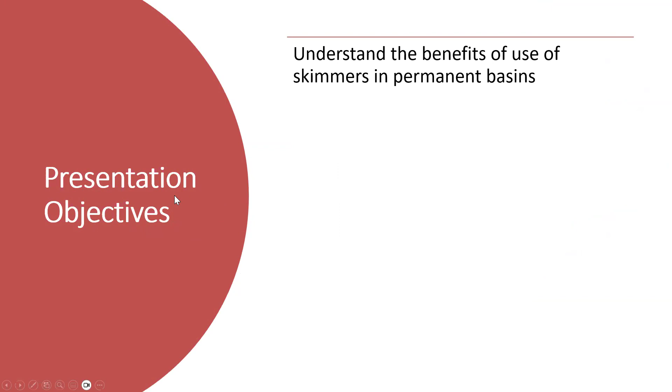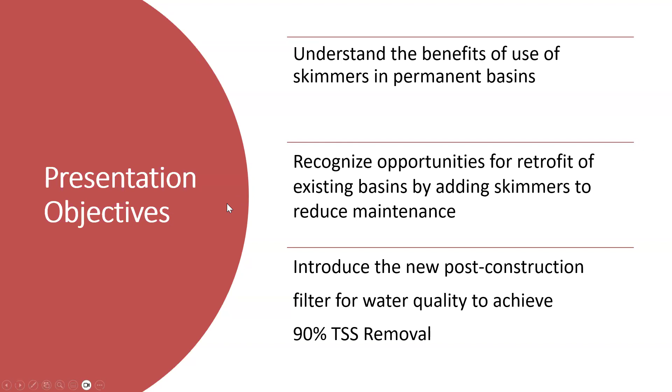So what we're going to talk about: we're going to understand the benefits of use of skimmers in permanent basins. Hopefully many of you are used to using these in construction settings and sediment basins. They've become quite popular and kind of the norm. We're going to talk about use in permanent basins. We're going to try to recognize some opportunities for retrofit of existing basins by adding skimmers to reduce maintenance and enhance water quality. And then we're going to introduce the new post-construction filter for water quality to achieve 90% TSS removal. I know that's all the goal we have is getting at least 80 to 85% TSS for most of our projects, and we'll show you how to do that with this new filter.

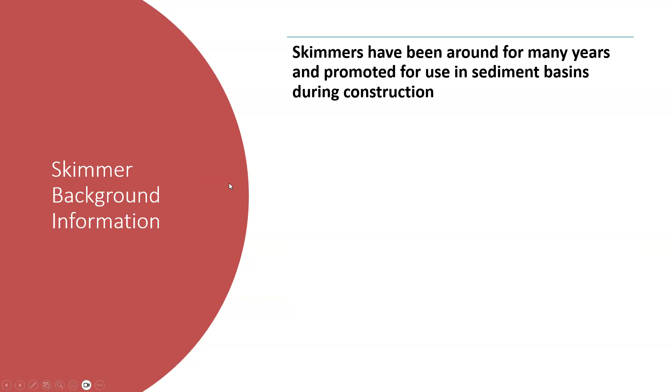So a little background information. Skimmers have been around for many years. They've been promoted for use in sediment basins during construction. That's probably been 20 to 25 years, depending on where you are in the country. I know some states are just now coming on with those, but like North Carolina, South Carolina have been around for quite a while. They meet the requirement for surface withdrawal from sediment basins. So most construction general permits have in there a provision to do dewatering from the surface of sediment basins, which drains the basin from the top down and it releases the cleaner water from near the surface. Skimmers have been shown to greatly increase trapping efficiency of sediment basins. So it's typical to get over 90% trapping during construction with those very heavy sediment loads, which is better than what we used to do with perforated risers.

Since we're doing that in construction, it makes sense to consider those for post-construction as well. So there are a variety of skimmers out there. The Faircloth skimmer kind of started things, at least on the commercial side of it. The Roshan Supply ESC skimmer, Marlee Float, IAS. There's one called the Delaware skimmer that is designed for contractors to be able to make themselves as well. And there's probably a few others, but these are the ones that I'm familiar with.

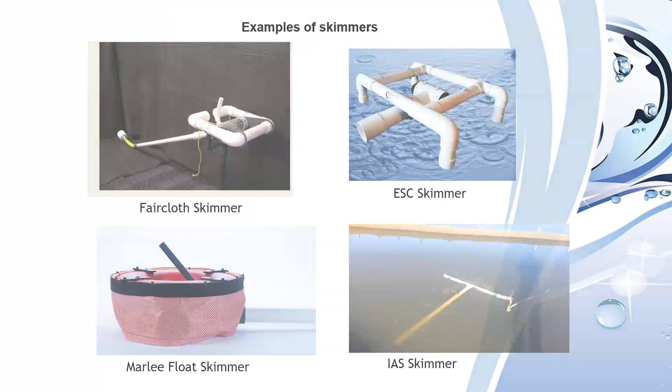Skimmers float at the surface of the water and withdraw from the surface or near the surface to release the cleaner water at the top of the water column. As water comes into your sediment basin, we want the sediment to settle as best we can, so the cleaner water is near the surface. The idea is you take that off first, giving more time for mud to settle and to trap as much sediment as you can.

I already got one question in chat, and I'll try to answer these as we go along, but may save some for the end. Can these work for cold weather climates during winter and freezing conditions? The answer is it depends. If I'm in South Carolina, yes, year round, because we don't get that. If you're in a very northern area with maybe six inches to a foot of ice, they're probably going to stop working once it gets really thick. So you do have to be aware of that if you're in a climate that gets more than say six inches or a foot of ice during the winter.

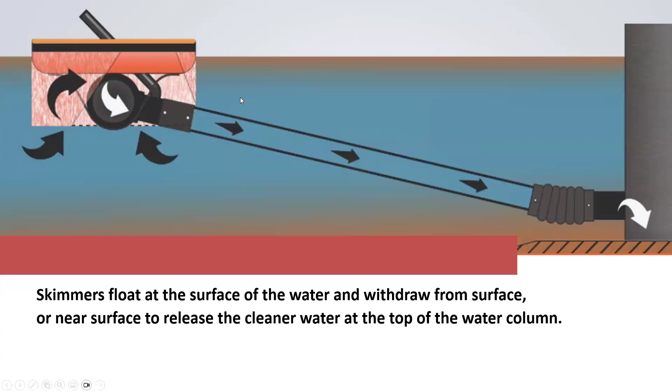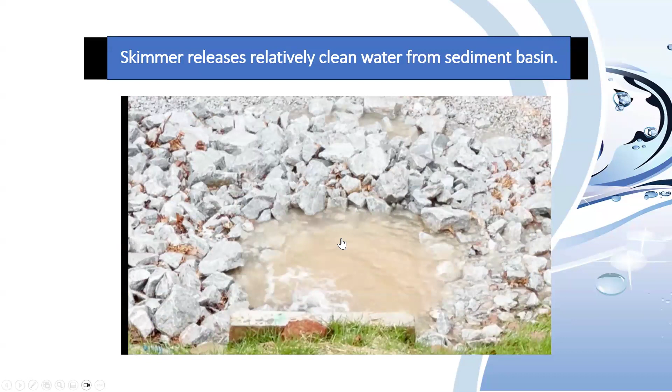Here's a quick video of a site not too far from us, right against Lake Hartwell, South Carolina. This is a sediment basin. You can see that basin was pretty muddy, but the discharge going out is actually relatively clean water. So from the really muddy sediment basin you saw there to that clean water being released, it's a good example of how effective skimmers can be during the construction phase in releasing cleaner water from the surface.

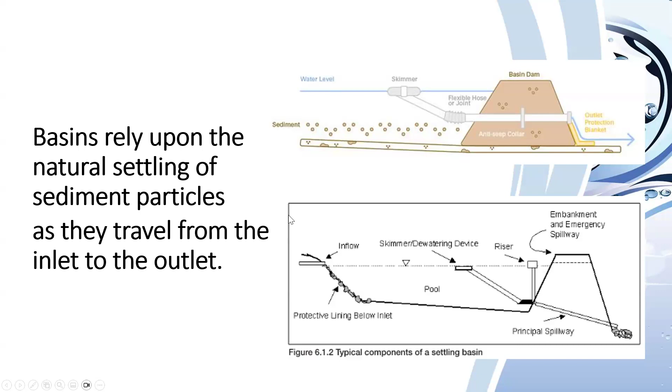Basins rely upon the natural settling of sediment particles as they travel from the inlet to the outlet. You've got water coming in, you've got sediment coming into the basin, so the idea is you want to get as much to settle as you can.

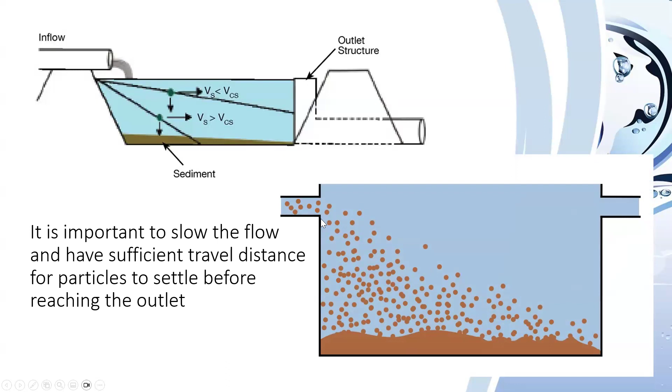Particle settling is dependent upon the particle size and the velocity of flow. So what we try to do is slow things down to give it time to settle. The heavy stuff's obviously going to settle out quicker, but the smaller particles tend to make it all the way to the outlet structure. So it's important to slow the flow down and have sufficient travel distance for the particles to settle before reaching the outlet. Here are a couple of graphic examples of what we're trying to accomplish: get the mud and sediment particles down to the bottom, and then release cleaner water from the pond.

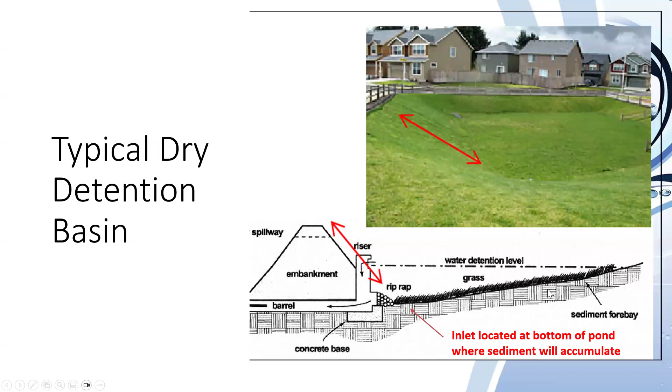So again, this is our typical dry basin. When construction's complete, you remove the skimmer. You can install some sort of low flow orifice at the bottom of the riser to release that first flush. This assumes you're in an area that has water quality requirements, and that first flush is the traditional method to achieve water quality. This often includes some sort of guard or filter to reduce clogging, to protect that as best you can. But with this traditional design, we're relying on ponding and settlement to settle all the sediment particles to the bottom of the pond, yet we're discharging from the bottom of the pond where the sediment concentration is highest.

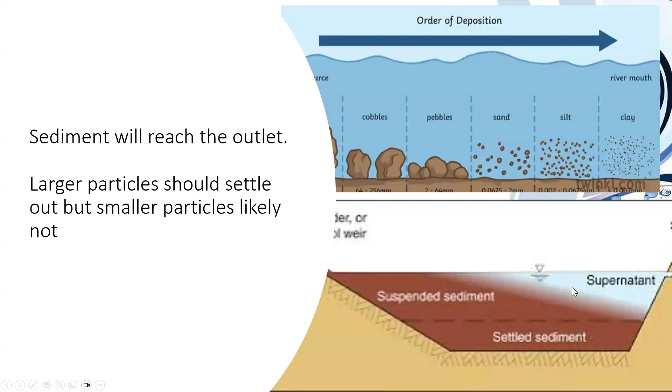So the sediment's going to reach the outlet. The larger particles are going to settle, but smaller particles likely will not. So what we want to do with the skimmer is use this natural settling and release the water off the surface sooner, or first, and then retain as much of this sediment in the pond as possible, which is what the pond is there for.

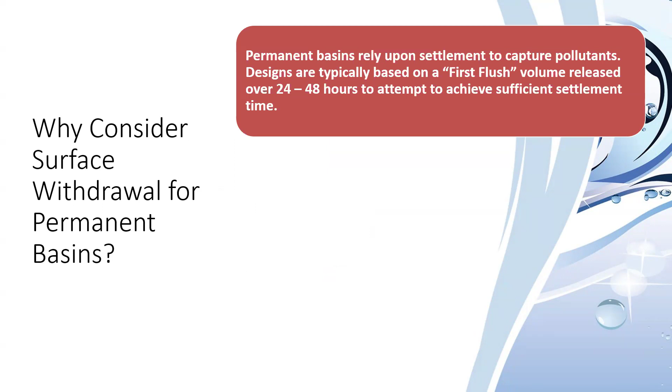So why would you consider withdrawal for permanent basins? First, permanent basins rely upon settlement to capture pollutants. Our designs are typically based on a first flush volume that's released over 24 to 48 hours to attempt to achieve sufficient settlement time.

The low flow water quality orifices often need to be 3 inches or less, depending on the size of your site, and they're prone to clogging. So they need some sort of anti-clog feature, whether it's a stone filter, perforated French drain type thing, or a variety of methods we try to use to prevent clogging there.

But the basins are meant to collect sediment, and over time they're going to have significant sediment buildup. So surface withdrawal from permanent detention or retention basins releases cleaner water from near the surface and allows more time for pollutants to settle.

Does it make sense to do this during construction, but then use an orifice at the bottom of the pond for post-construction? They've been very effective for construction basins, so it just makes common sense to consider that for permanent use as well.

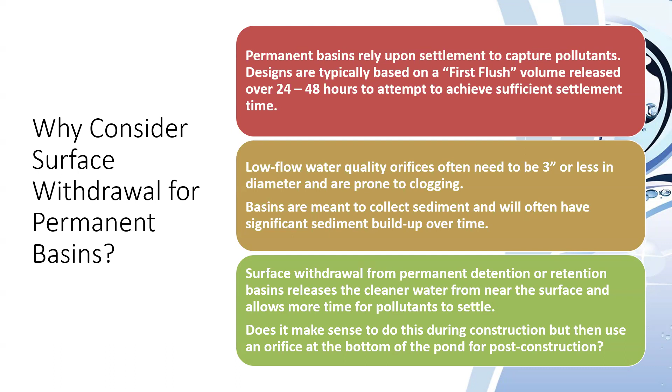To give an example, we're going to show two case studies. Both of these are projects I've been involved with over the past 10 years, two areas where we retrofitted ponds to help with maintenance issues. One is a former car dealership, Simpsonville Chevrolet in Simpsonville, South Carolina, and one is an apartment complex in Charlotte, North Carolina.

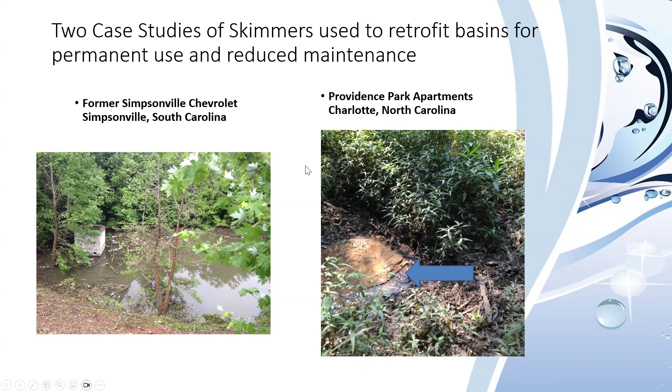So first we're going to look at this former car dealership. This whole wooded area, that's the pond. No surprise, they received a notice of violation for failure to maintain the pond, as it was severely overgrown and the outlet structure was not functioning properly.

After the timber was removed, and I do mean timber, it was 6 to 8 inch trees in there, we had a pond that was holding water, and it's typical in this area to have dry ponds.

We couldn't figure out why it was holding water because you didn't see any kind of low flow outlet in there. It was determined there was about 6 feet of mud and debris, and there was a 2 inch outlet at the bottom of this basin that evidently had clogged many years ago, and debris just kept building up over time.

Due to the size of the pond and the steep banks, it's about 3/4 of an acre pond. Side slopes are about 1.5 to 1, so getting equipment in and out is very challenging. We had initial estimates to clean the pond out that were $60,000 to $75,000, and this was back in 2013.

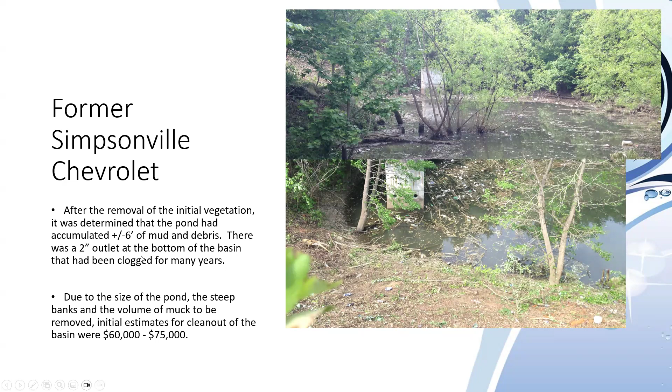We worked with the owner. We redesigned the basin, designed it to allow all that muck and debris to remain in, and modified the outlet structure to still meet regulatory requirements. This pond is located in Greenville County as the MS4, and they required that we maintain that 2 inch low flow discharge rate as part of the original design.

But we wanted to do that in a way that would not clog as easily as it did the first time. So, not having to remove the sediment buildup, we had a savings of over about $50,000 in the cleanup of this pond.

So what we did is we installed a skimmer, with a 5 inch orifice. We had to get this approved as a pilot project because at that time, skimmers were not allowed to be part of the permanent outlet structure in the county.

But that 5 inch orifice with very little head on it gave a flow very close to the 2 inch low flow orifice before. So the other orifices in the outlet structure were modified. You can see here, we closed in these orifices, put in some new ones, and kept the top of the riser structure.

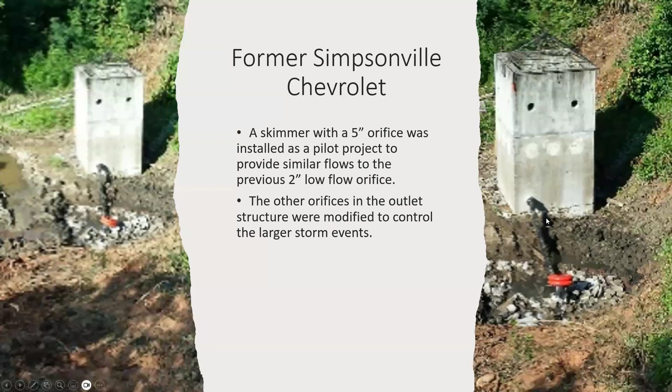It's hard to tell here, but that riser is about 12 feet tall. And there's another 6 feet of riser that's below what is now the bottom of the pond, from all the muck and debris that had built up over there.

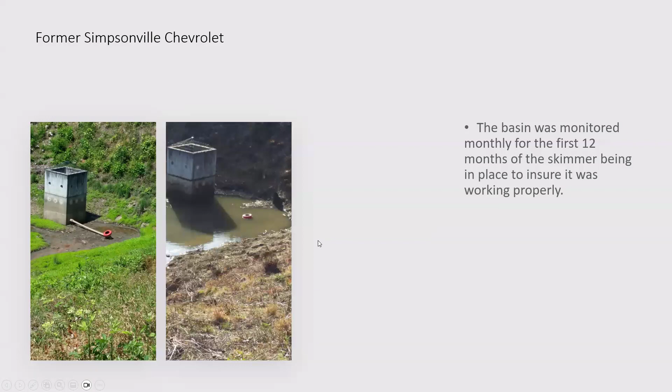Because it was a pilot project, we had to monitor it for the first 12 months of the skimmer being in place to ensure it was working properly. These are some different photos from different times during those first 12 months, just to make sure it was still functioning as designed, since this was the first time a skimmer had been allowed to go into a pond permanently in this area.

About a year later, in August of 2014, the owner was maintaining the pond. They had gone in and cut the sides and banks and not pulled out all the debris, basically letting it all fall to the bottom.

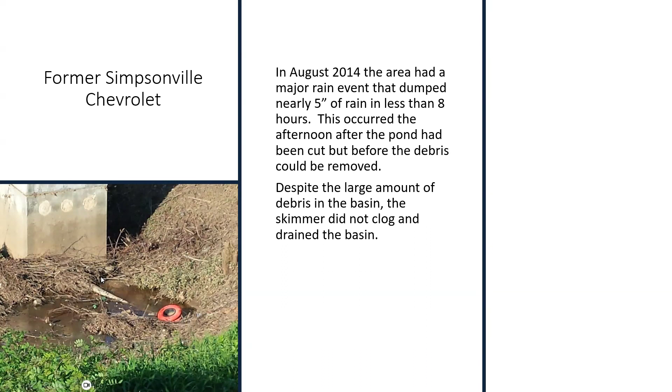We had a 5 inch rain in less than 8 hours, and it filled the pond up entirely and washed all that muck and debris down to the bottom of the pond. But as you can see, the skimmer sitting there, even with all that debris in the basin, still drained the pond down.

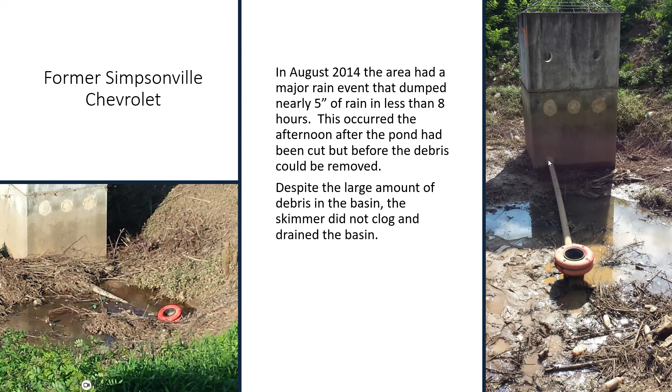And if it had become clogged, it's got a rope here—hard to see in the picture, but you could tug on the rope to get the skimmer to the side to unclog it. Much safer to do so than if you had a 2 inch orifice and 8 to 10 feet of water, trying to get to that orifice to unclog it. It would have been a very dangerous situation.

So we've now been using this pond as our area for research and development. We've done a lot of prototyping for ideas with improvements to the skimmer, and also adding filtration or filter fabric to the skimmer. This is one of the early prototypes we worked on. We put a filter around the skimmer to see if we could create something that would provide even higher water quality. The picture to the left is really typical.

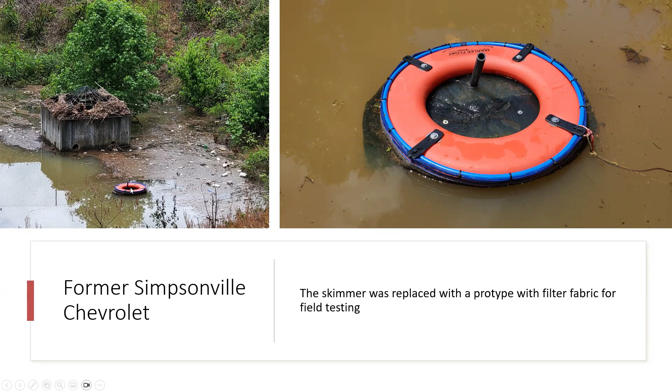This pond is in an area that's heavily commercially developed, but has very few other stormwater management facilities. So it receives about 30 to 40 acres of runoff, and it all comes to this basin. It has a lot of trash and debris in it, as you can see. So it requires some maintenance pretty routinely, but the skimmers definitely help keep it from clogging.

The modification of that pond resulted in a savings of about $50,000 in maintenance expense. Skimmers function very well as a low flow water quality outlet, and it's been much less prone to clog and easy to access for maintenance. As I said earlier, we continue to use this site as our research and development for the filter concept.

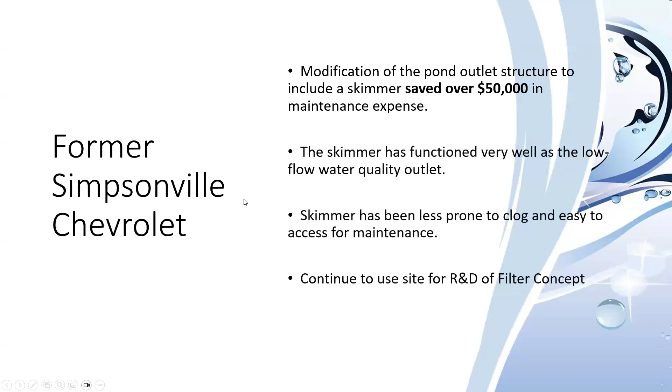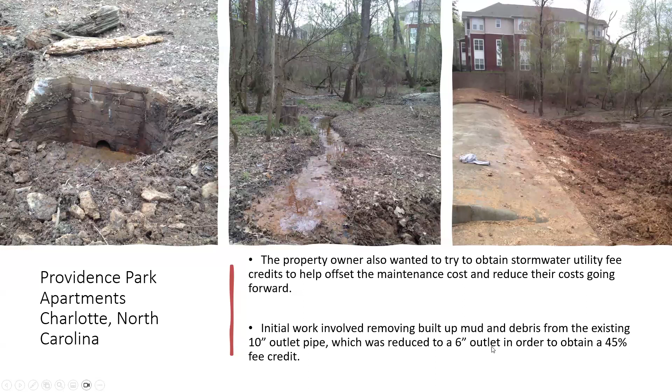The property owner also wanted to try to obtain a stormwater utility fee credit to help offset the maintenance work and reduce their costs going forward. So initial work involved removing all the built up mud and debris. From the existing outlet, we reduced that outlet to a 6-inch outlet, and we obtained a 45% fee credit for them at the time.

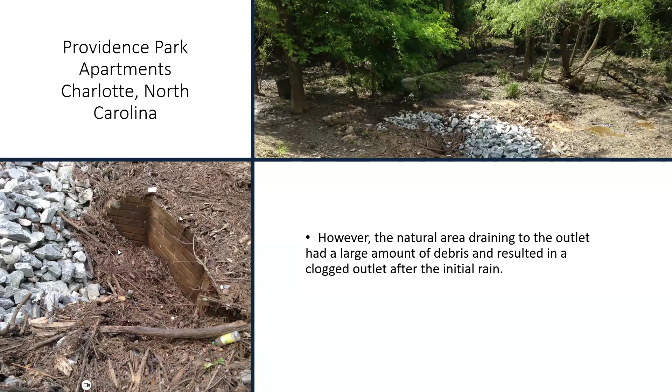However, with all the natural debris there, that didn't work very well. Every time it would rain, that outlet would get clogged up. Even though we had this nice riprap berm around it, water would come over that and put all the roots and limbs and rocks and leaves in there. Occasionally it would really clog up and hold water for days, if not weeks, and it was nearly impossible to keep the outlet flowing. The depth of the pond made it very difficult to clear the obstructions when clogged - this water is probably 6 feet deep or so, very difficult to get to the head wall and clear it out.

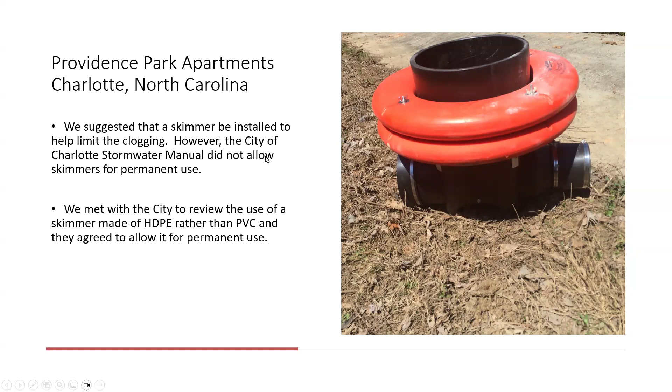So we suggested that a skimmer be installed to help limit the clogging. However, the City of Charlotte Stormwater Manual specifically did not allow the use of skimmers for permanent use. So we met with the city to review the use of a skimmer. This one in particular is made of HDPE rather than PVC, and they agreed to allow it for permanent use on the condition that we provide annual monitoring for them.

So we redesigned the pond to include a riser structure instead of just the pipe, and added the skimmer. In doing so, we also designed this on purpose to maximize their stormwater fee credit. The new design resulted in a 95% fee credit, which for this site was a savings in their stormwater fees of nearly $25,000 per year.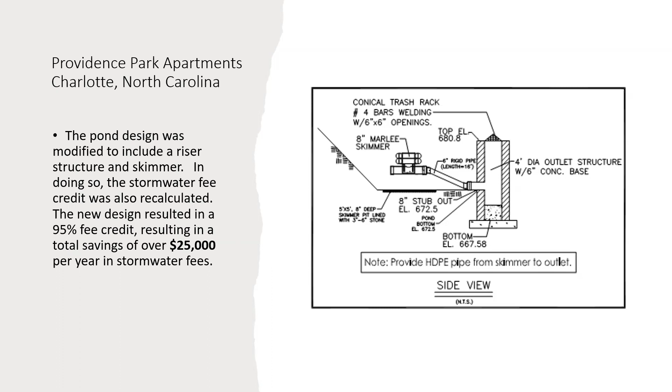So this is once the riser was put in and the skimmer put in place. You can see we dug out an area here for some sediment accumulation over time.

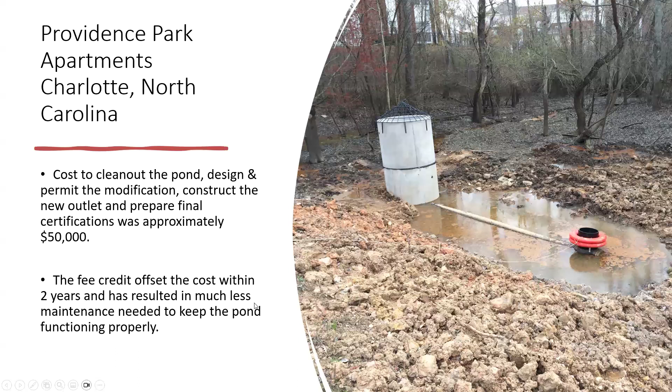But the cost to clean out the pond, design the permit modifications, construct the new outlet, and do all the final certifications was about $50,000 in total. And the fee credit savings of $25,000 offset that cost within 2 years.

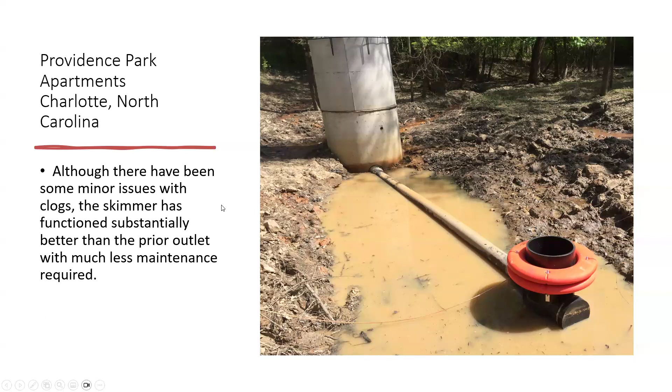There have been a few issues over time. We've had to tweak things here and there, but overall it's functioned extremely well with much less maintenance required. The pond continues to be monitored annually and functions with the skimmer in place. In August of 2021, we replaced the skimmer with a new design we developed in 2020, installing it as a prototype so we could keep an eye on it.

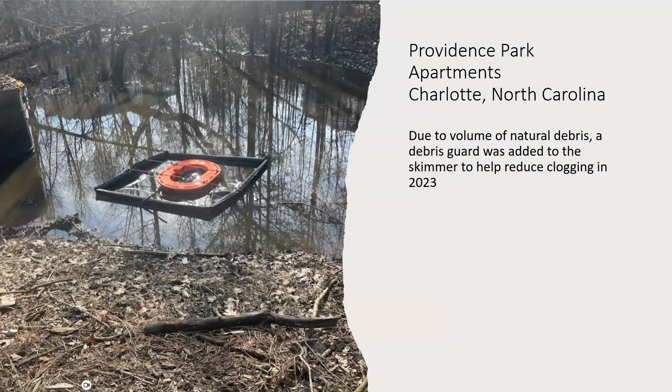Then in 2023, because there was so much natural debris in there, they were still having to go down after each rain to shake the skimmer and get it unclogged. So we installed a guard around it to help with the debris and keep the skimmer requiring less maintenance.

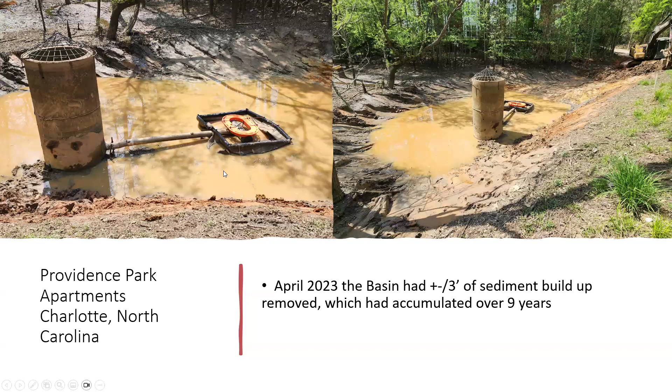Also in 2023, they had to do some maintenance. Remember, this riser structure was put in place in 2014. So between 2014 and April 2023, about 3 feet of sediment built up that had to be removed, accumulated over those 9 years. That's exactly what detention ponds are supposed to do, right? Capturing all that silt, debris, and sediment in the pond kept it from going downstream and impacting the waters downstream. So the riser structure and skimmer setup showed to be very effective in capturing the sediment coming to the pond.

So normally I do a little poll here, and since I set up the Zoom, I don't have poll ability, but I'll ask the audience: have you ever considered using a skimmer permanently? Through chat, or unmute and say yes or no, feel free to comment. The follow-up is, if not, now that you're aware of the benefits, would you consider it?

So we'll look at some flaws with the traditional method of doing water quality. Extended detention for water quality is what I see most often, either in dry ponds or wet ponds, using extended detention and a low flow orifice. The basin is designed to capture pollutants by holding runoff for an extended time, intended to allow for settlement—holding the water in the basin long enough for sediment particles to settle out.

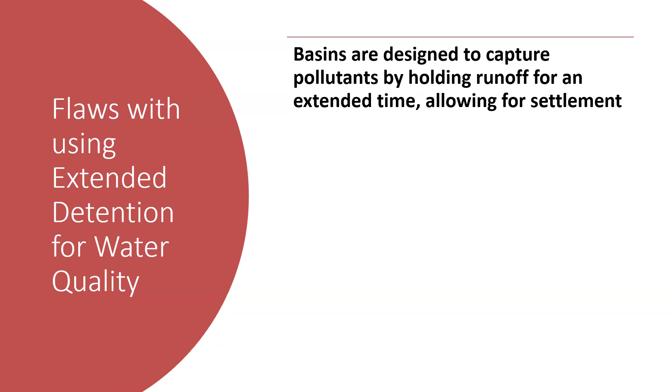So basins that rely on settling time provide very little treatment for smaller storm events. If you've got very little ponding or holding time and your whole method is based on settlement time, then with a small storm—say a quarter-inch or half-inch of rain over 8 or 10 hours—it's going to be really tough to get much settlement because you have so limited ponding time. Also, the volume-based design results in larger pond sizes, which we'll show in a bit, due to that first flush methodology.

Looks like you have some responses in the chat from the poll. I see we've got a lot of no's—people thought they were temporary. One yes, one about winter conditions. I agree with you on the winter conditions—you've got to either allow for intake or outtake, or what we often see is putting in a perforated riser with a valve on it. If you have frozen conditions, you can open that valve and allow the water to go through the riser for that limited time. But it's not a perfect solution everywhere, and certainly if you have a lot of ice, you have to consider it.

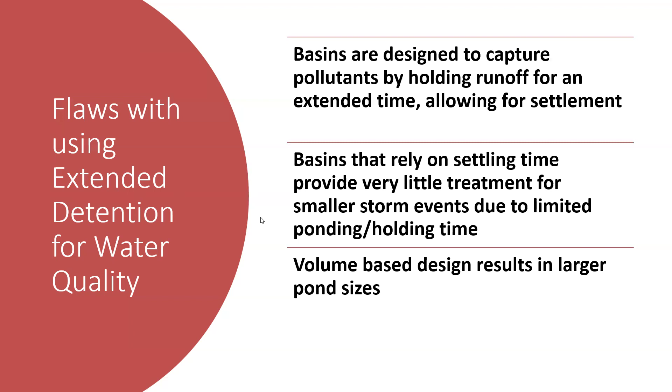All right, so what are some benefits to filtration instead of settling? Let's think about ways to provide water quality—you can either let the sediment settle, or use some sort of filter or other way to take the sediment out of the water before it gets discharged.

Number one, ponds provide a large containment volume to reduce maintenance frequency and treat larger drainage areas. If you're filtering but using that filter to keep the sediment in the pond, you've got a pretty big volume of sediment you can hold there, kind of like we just showed on that Providence Park pond.

Also, there's an excellent potential to retrofit older basins that did not include water quality benefits in the design, if your peak flow rate can be maintained. So I'm sure many of you are doing redevelopment. You go into the shopping center and it's 30 years old and it's time to redo something - tear down one building, put in something new, change a parking lot. And often we're required to provide water quality, and there may be a detention pond there that was just quantity based, but no quality.

If you try to use that traditional first flush method and hold that first flush volume over for an extended period of time, you don't have enough volume. However, if you can use a filter and maintain that flow rate, that's an excellent way to retrofit that pond, and really a very cost-effective way to provide water quality for the entire area draining to the pond.

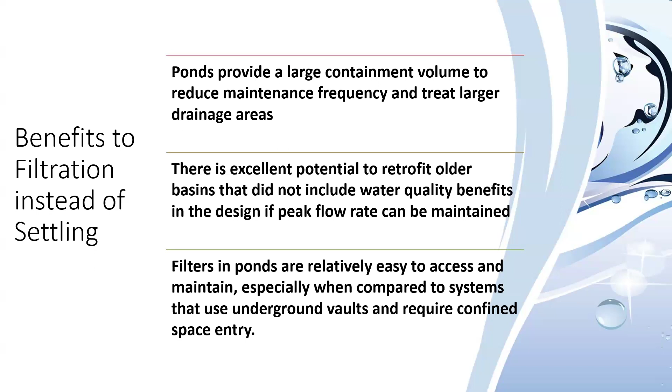So some of the other benefits to filtration versus settlement is the peak rate of discharge can be based on the filter treatment flow rate up to that first quantity storm event, which results in smaller pond volumes. Typically, when we're designing these ponds, a 2-year storm is probably the norm. Some places require a 1-year storm as the smallest you've got to look at for quantity controls.

If your filter can handle that rate, you can discharge at that rate up to that event. The other benefit is the filter treats 100% of runoff from the storms up to the peak rate of the filter, including the very small storms with minimal ponding. So if you're using filtration and you had that really small storm event, that small storm still has to go through the filter to be discharged. So it's now being treated, typically much more effectively than it would be if we were relying on settlement and ponding to do so.

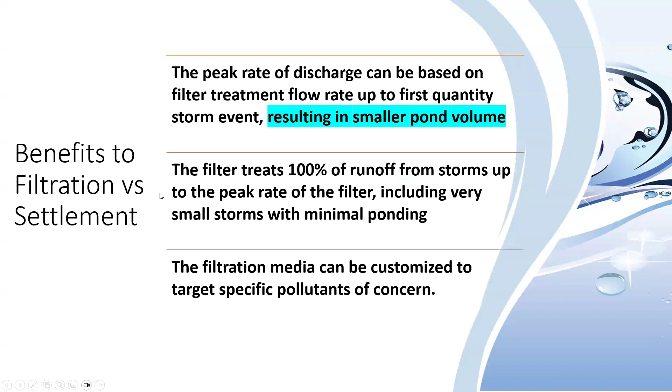The last item is the filtration media can be customized to target specific pollutants of concern. Hydrocarbons are a concern in many areas - it's pretty easy to add a media that can absorb hydrocarbons. Metals may be a concern, phosphorus, nitrogen. There are a variety of other materials out there that can be added to your filter, providing a real benefit in targeting some pollutants that settlement by itself may have a harder time removing.

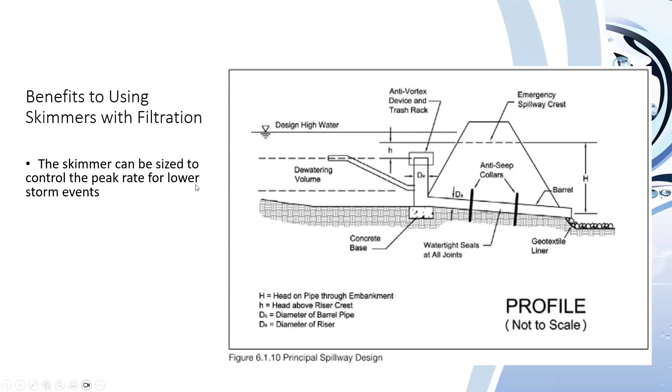So we've talked about filtration. Now let's add a skimmer to a filter. What would be the benefits to using skimmers with filtration? One, the skimmer can be sized to control that peak rate for the lower storm events. Depending on the size of your site, you may be able to size the skimmer to handle that 2-year flow. So now the skimmer is your low flow orifice, and also it's handling up to your 2-year storm event.

I apologize, I'm fighting a little bit of a cold today, so trying to minimize the coughing.

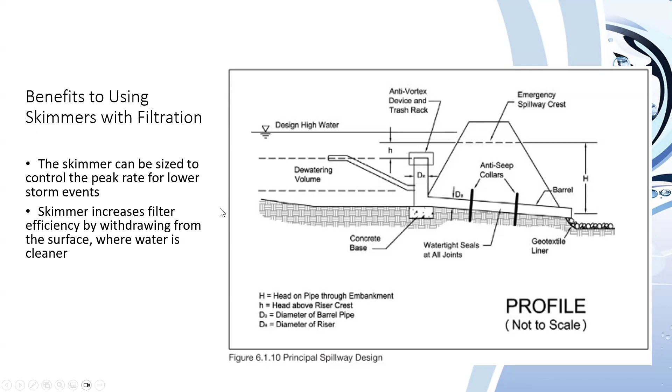The skimmer increases your filter efficiency by withdrawing water from the surface where the water is cleaner. If your filter were just stuck down at the bottom, it's going to get the highest concentration of sediment. But if your filter can float up and down with the water level and just treat the water closer to the surface, it's not having to work as hard. There's less concentration there, so your filter works better, lasts longer, and has a higher efficiency rate. Lastly, the skimmer is easy to access or pull to the side of the pond, so you can get to that filter and skimmer for maintenance and changing of the filters.

So there are some challenges to using skimmers with filtration. Number one, filters are prone to clog over time and will require maintenance and periodic cleaning or changing. We all recognize maintenance is a huge issue in stormwater management, whether it's a pond, a catch basin filter, or any other type of device, and even an LID - a sand filter, bio retention area - any of those things are going to require maintenance over time. Filters may require a little more maintenance than some of the other products, but they're maybe also less costly to do so and easier to get to.

A skimmer has to be durable and last more than a few years to be suitable for permanent use. We recommend HDPE versus PVC products for this. There may be other products that are more durable and designed for permanent use, but you have to make sure it's going to hold up for quite a while.

You need something that's not going to degrade in UV over 2 to 3 years. We've also had a couple of comments about frozen conditions. You're going to need an alternate drain during frozen conditions, or it just may not be suitable. If you're in an area that has several months out of the year with frozen conditions, this just may not be the right tool for that situation.

The biggest challenge we see right now is there are no established standards for basis of design and permitting based upon a combination of pond and filtration.

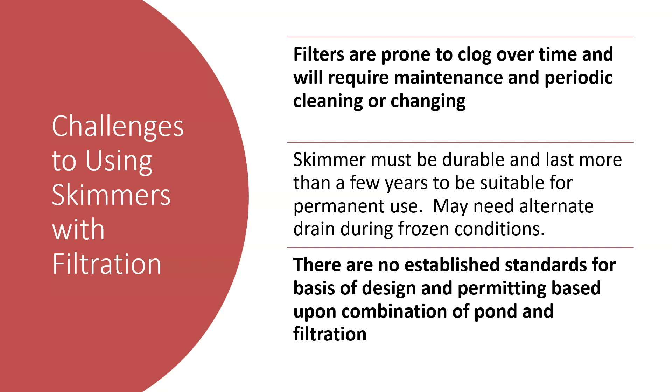Rebecca was kind enough to share our attendee list on Friday, and skimming through, it looked like we had a lot of city, county, regulatory folks who had signed up for this. So for those of you on here, I'd love to hear your thoughts on how we manage the permitting process and how you can incorporate ideas that are maybe a little outside of the mainstream, but also very effective, so that those tools can be allowed to be used in your area.

Currently there are 2 widely recognized testing protocols that I'm aware of: the Washington TAPE program and the NJCAT certification program. The Washington TAPE program is a field version, so you actually have to find sites, go through a year or two of storms, have those monitored and sampled and lab tested to show the results. Very effective, gives you real world test data, but also very expensive and time consuming.

You also have the NJCAT certification program. NJCAT has established protocols and standards for testing, and a lab has to be certified to meet their certification. That lab can then test your product, you send the results into NJCAT, and they'll verify your device and say you're now certified to meet a certain percentage TSS removal. TSS is the main one.

What you may not be aware of is that ASTM now has standards for sediment retention and sediment devices and stormwater products. ASTM is still in development of many of these; some have not been finalized yet, and others are coming.

Somebody asked if there's a speaker voice technical problem. I hope not, but if other people are having trouble hearing me, please let me know. So far, it sounds good.

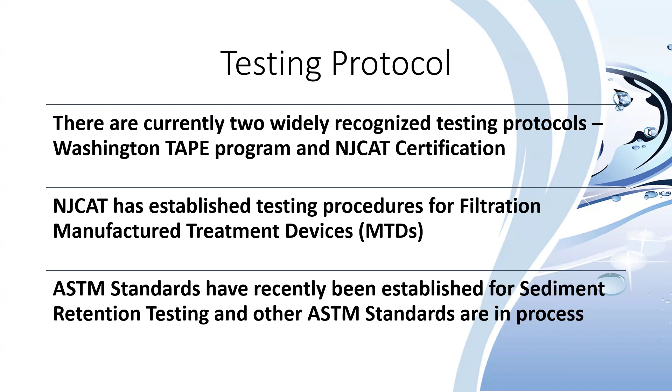So again, ASTM standards have come out, and some of you may also be familiar with STEPP, a national stormwater program—I can't even remember what STEPP stands for. But all the STEPP program protocols are going to be based on ASTM standards. ASTM has long been recognized as having a very rigorous process for establishing their standards, a very trustworthy program, and a good basis to base your designs on.

We've gone through prototyping, trying to come up with how to do a filter around a skimmer, for about 5 years now. I'll go through a couple of examples to show the process. We had one with strips of non-woven geotextile on the outside and coir fabric on the inside, plus another layer of fabric, trying to make sure we filtered water thoroughly. We had a flow rate of about 140 to 150 gallons per minute per square foot, trying to keep up with the skimmer.

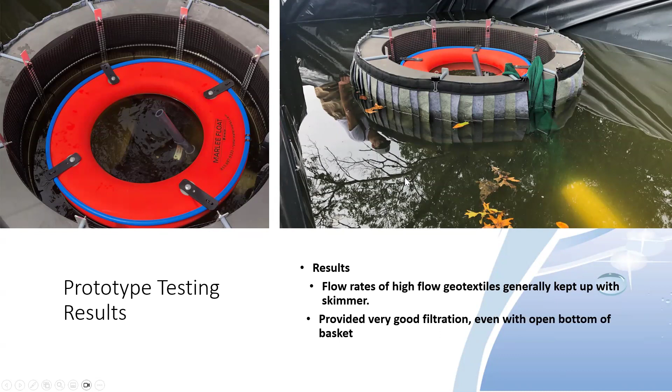What we found is the flow rates generally kept up with the skimmer and it provided good filtration. In this case we had an open bottom, so the thought was you'd filter what's near the surface, and if it was more than a couple feet below the surface, you'd just let gravity do its job. But over time we found this wasn't big enough to keep up with the flow rate of the skimmer, especially on some of the larger skimmers. We even put dye in the test tank to see if water was getting pulled in.

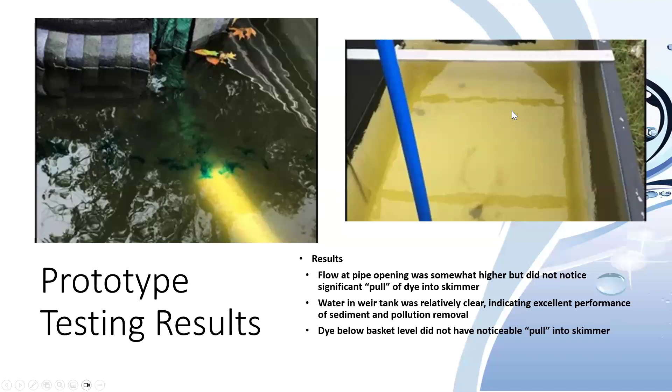Because you obviously got a pipe leaving, is water getting pulled in through that opening or pulled in through the bottom? Saw very little of that. This picture on the right is the outflow. We had a weir tank set up to test the flow rates, and really clear water was coming into this. We were pulling water from a farm pond, so it wasn't really dirty either, but I can say the water here was much cleaner than what we were pumping into it.

Again, kind of check the fabric. We had a lot of algae and general debris in the farm pond getting pumped in. What we found is the coir fabric did not seem to blind off or trap too much of that, so it showed pretty good filtration.

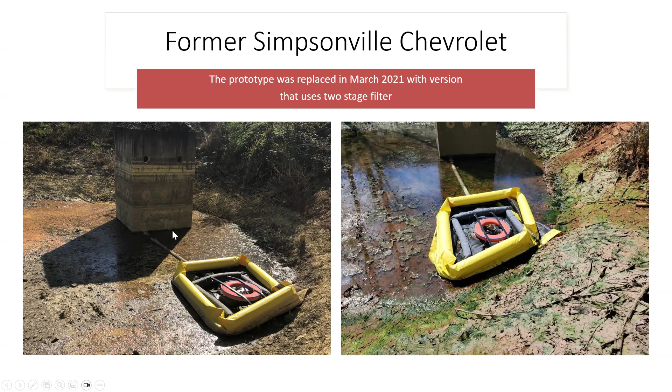But we decided in the end to go with a different product. So we did a two-stage filter back in March of '21. The outer stage is sort of a turbidity curtain, with just a polyethylene screen in it - it's a Mirafi fabric. The inner was a non-woven material called Adsorbate, which in addition to TSS would absorb hydrocarbons as well. This is in that same pond we showed earlier as one of our examples for research and development.

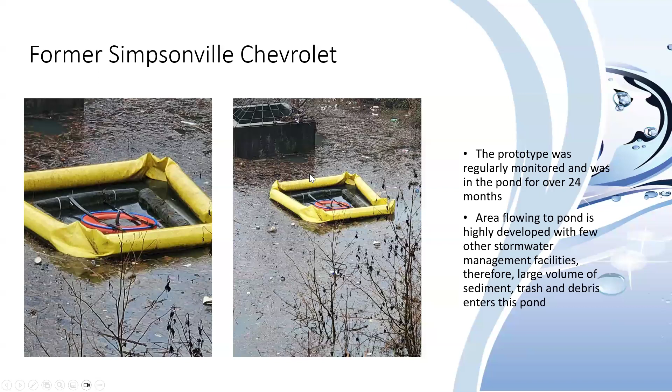We had the prototype in the pond for over 24 months. We wanted to make sure it would last long enough to be worthy of having on a site - if it's going to fall apart or clog up in 6 months, it's not going to work. The area flowing into this pond is highly developed with few other stormwater management controls. As you can see from these photos, a large volume of trash and debris enters this pond, making it a real challenge to keep the outflow clean.

We set up a time-lapse camera at the pond, and this was taken in July of '21. You can see here, on July 7th it just started to rain. By the morning of July 8th, about 12 hours later, the pond was full - you can see the skimmer here is all the way up to the top of the riser.

Later that morning, the pond's now starting to come down. That evening, it finally stopped raining, and it kind of rained on and off most of the day of the 8th. By the morning of the 9th, you can see we've made some progress draining it down, and by the 10th it's pretty much already drained.

If you recall, the design of this pond was based on the first flush method, so the intent was to hold a 1-inch runoff volume for at least 24 hours. This time lapse shows we're holding it for about 48 hours to drain that full volume down. The volume all the way up to these orifices is more than that 1 inch - that's probably more of a full 2-year storm, so probably 3 or 4 inches of runoff from the area coming down. It's a good example of skimmers working, draining the basin slowly, allowing the sediment and other pollutant particles to settle out.

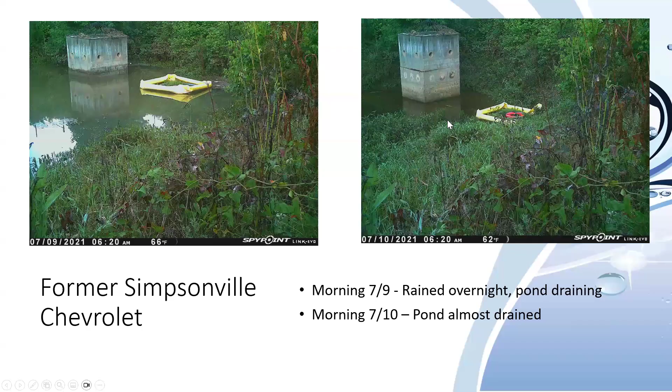One of the other things we noticed during this time was vegetation started to grow in the inner non-woven filter. At first we were like, that's not a good thing. But then we started thinking, hey, if we put the right seeds in this thing, and it's kind of in that non-woven filter fabric that just catches stuff, maybe there's some potential for nutrient removal. We also recognize nutrient removal sometimes takes a lot of vegetation for any kind of uptake of phosphorus or nitrogen, so maybe not - we'll kind of test that in the future. But it was just an interesting observation that happened.

Over the winter, the vegetation died, so we went in and trimmed it up, cleaned it up a little bit, but we didn't change out the filters - we wanted to keep those in place to see how long they would last, make sure they'd last at least 2 years. So again, we may look in the future at potential to target certain pollutants with certain vegetation, if we can get enough of that, especially on the larger filters.

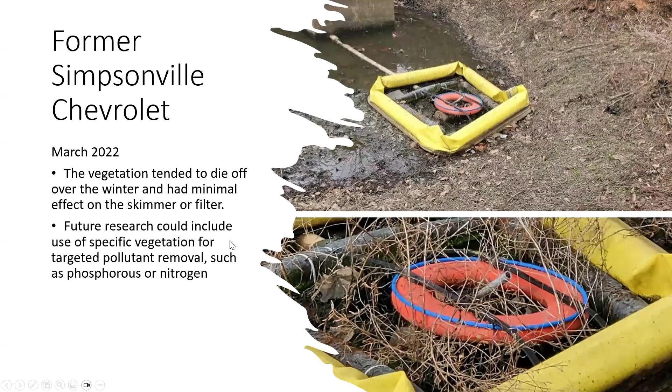We did notice in July of that year, the vegetation returned. It could be something worthwhile, although I'm not huge on the chemistry for the phosphorus and nitrogen - so if you only had the vegetation growing during the spring and summer months, would that still be a benefit or not if it died off during the winter?

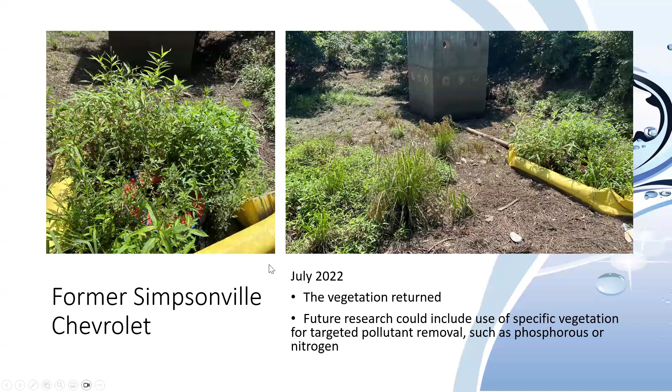So the field testing showed that it seemed to be working well. So we decided to take the next step and go to third-party testing to confirm TSS removal, and we had TRI Environmental do that testing for us.

When we had TRI do the testing, we wanted to do this in a way that would give us the worst case scenario. So the ASTM requirement, or standard, requires two versions of the skimmer with the filter to be tested, and there had to be double the flow rate between one and the next. One was tested at around 30 gallons per minute flow rate, and the other had like 140 gallons per minute flow rate. So pretty different flow rates there.

The other thing we did is we had the sediment-laden water enter right at the filter. With your typical detention basin, you're going to have a forebay, and you're going to try to maximize the length between your inlet and outlet to give as much distance and settling time as you can. Well, we said it's going to be really hard if we incorporate all that to see how much of a benefit the forebay was, how much was the travel distance, how much is the filter, how much is surface withdrawal.

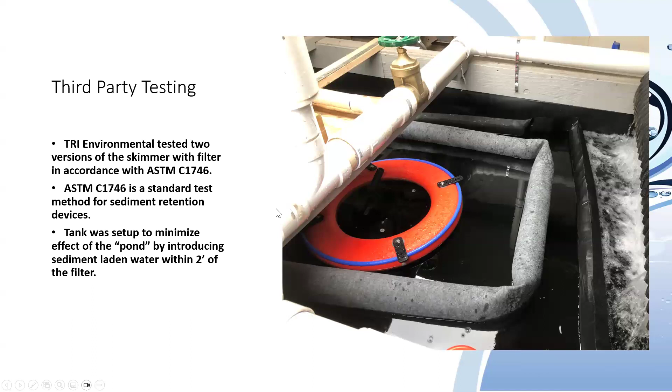Again, we did this to the ASTM standard C1746, which is the standard test method for sediment retention devices. We've had some questions in the past about soil gradation - all that's in the test. I can't include that in this presentation, but if anybody has any questions, we're happy to provide the test results and all that backup detail.

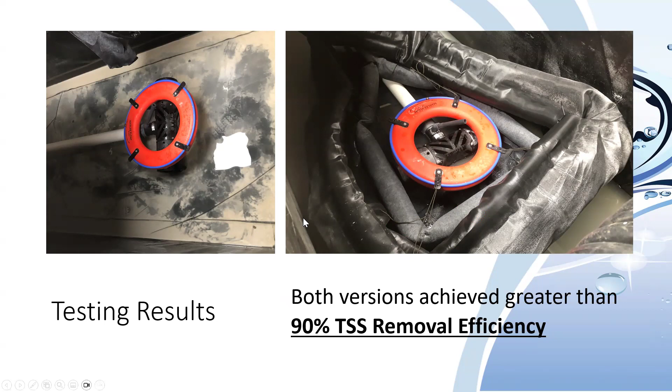So again, we had to do two versions of the skimmer. Both versions achieved greater than 90% TSS removal efficiency - one got 92%, one got 96%. TRI felt comfortable saying 90% was reasonable for the skimmers. Based on these test results, we can scale the size of the filters for other skimmer sizes as well that have higher flow rates than what the test tank could handle.

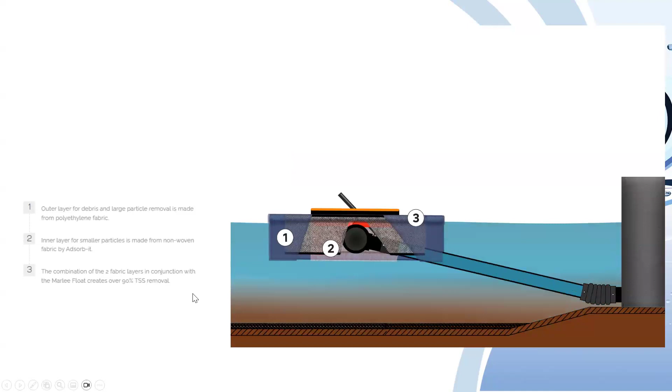So this is just a representation of how that works. You've got an outer layer for debris and large particle removal - it's a polyethylene fabric. You've got an inner layer for the smaller particles, again that's the non-woven fabric by Adsorb-it. The version we use actually has an antimicrobial treatment as well. And when you put those together with the skimmer, with the surface withdrawal, that system achieved the 90% TSS removal rate.

Now I want to talk about advanced skimmer modeling, so a filtration-based water quality approach, and how that would compare to your traditional first flush model. We're going to go through a sample site here. The first flush model, if you're not familiar with it, typically you take a certain volume - in our area it's 1 inch of runoff over your area, and you release that over 24 to 48 hours. Versus a filtration-based model, which is just based on the flow rate of the filter to be able to handle that flow and treatment up to whatever your first quantity storm is.

So our sample site, let's just assume we have 5 acres. We've got a pre-development condition, curve number 55 for wooded, and post-development is going to be commercial. So we're going to take a 5 acre natural wooded area and convert it to a shopping center.

Got a question about Georgia using turbidity as criteria rather than TSS. I am familiar with turbidity as a requirement during construction in Georgia. I'm not familiar if Georgia has that requirement post-construction. And what I would say is the skimmers do a little bit of help with turbidity during construction, not much - you're really going to need flocculants or some other way to take out turbidity.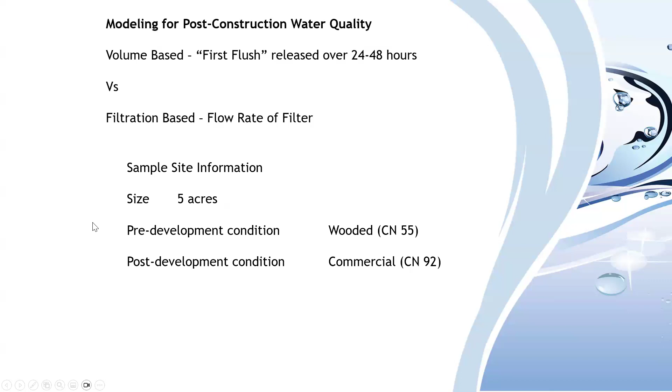So anyway, getting back to our sample here - post-development, again, we're going to a shopping center, curve number 92. The first thing we're going to do is come up with what our pre-development flow rates are. So based upon a 5 acre site, I just assumed a time of concentration of 48 minutes.

And we said our 2-year flow is going to be 0.72 CFS. Oops, back up—10-year, 325, so on. So we're really just going to focus on this 2-year and lower flow rate for this example.

So the next thing we're going to do is look at our water quality volume and our post-development flow rates. Based upon that 5 acre commercial site, I assumed a time of concentration of 10 minutes, and we want to calculate the water quality event.

In this area, we just assumed a 1 inch runoff was what's required. So I went through trial and error and came up with a 1.73 inch 24-hour storm that would generate that 18,150 cubic foot volume of runoff. So even though it's curve number 92, it takes more than 1 inch of rain to generate a 1 inch runoff volume—almost 2 inches of rain in this case.

It's important to note the water quality volume does vary from state to state. 1 inch to 1.5 inches is typical, is what I'm seeing in most states as far as requirements. But in this case, our water quality flow rate—this is just post-development before any pond—is 7.2 CFS. And the 2-year was jumped up from 0.72 to 19.72 CFS.

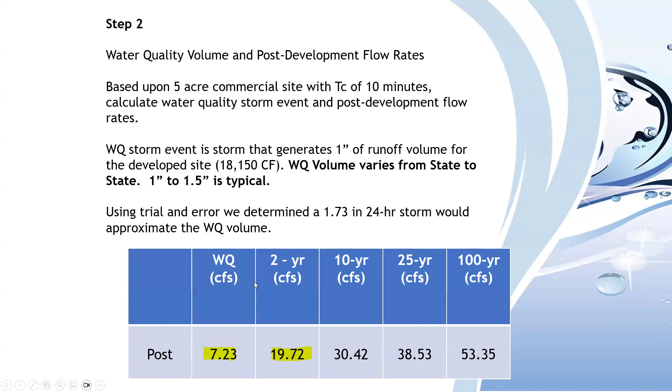In the traditional first flush method, most engineers I've talked to have a spreadsheet somewhat similar to this, and they calculate the size orifice required to drain that volume within whatever time. In this case, we've got 5 acres, so we've got 217,800 square feet of area.

That 1 inch is going to generate 18,150 cubic feet of volume. We're going to base that on a 24-hour time frame and come up with a flow rate of 0.21 cubic feet per second. There's some head calculations in that to come up with the required orifice size. Let the spreadsheet do its work, and we come out with a 0.21 feet, or 2.6 inch, orifice.

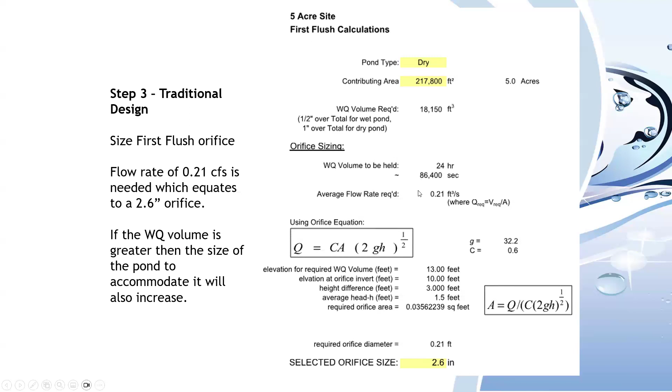One thing to point out about this method is it assumes that this water quality volume kind of magically appears in the pond, right? Obviously we know there's a hydrograph—it's coming in at a certain rate and going out at a certain rate. But when we calculate this orifice size, we're assuming it all gets there instantaneously, and then we drain that down over 24 hours, which we know is not really how it's going to happen. But anyway, that's what we do.

So we came up with this pond design: this volume of 18,150 cubic feet—bottom of my pond's 110, so I got to 113, about a 3-foot depth in this hypothetical pond to hold that volume. Put in a 3-inch orifice above that, another 8-inch orifice above that, and then the top of the trash rack. That's my 2-year storm control, my 10-year storm control, then my 25 or 100-year storm control. We'll assume we have a 3-inch orifice down here instead of 2.6, just so it's easy for the contractor to put in the correct size.

So when we run through our hydrology program, our water quality flow rate going out now is 0.25 CFS. And as we note here, we're not using that 18,150 cubic feet—we're really only using just under 10,700 cubic feet. So about 2/3, or just under 2/3, of the volume that's required is actually being used for that hydrograph.

Now the rest of this volume, typically you're not allowed to put any orifices in there. So we've got an elevation of 113, where our peak elevation here is really 112.51. So we've got about half a foot in the pond that's basically excess storage. It'll help with our larger storm events, but it's really not being used to its full potential.

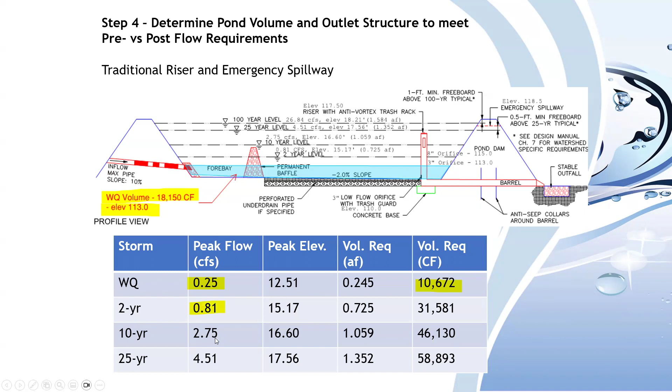Our 2-year storm in this case is 0.81 CFS. Our pre was 0.72. I fully realize that there are certain areas where the reviewer is going to say it has to be 0.72 and no higher. Other areas may let you get away with a slight increase in that 2-year storm as long as you're maintaining the 10 and the 25. But anyway, that's MS4 specific.

So if you run these, just a summary table, but the thing here to point out—these are the storage amounts required under this traditional pond analysis, and we will use those a little bit later.

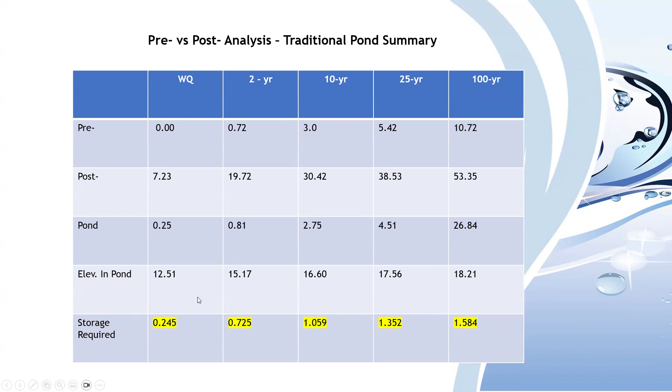So the next thing we do is we're going to look at a skimmer with a filter design. The first thing we want to do is select the skimmer that's going to be close to that 2-year storm rate. In this case, our 2-year storm flow is 0.72, so we go over here and pick out our 6-inch skimmer with a 6-inch orifice, which flows at 0.78. That's going to be the first one we try with this model and see how it works out.

So this is the detail for the filter. A couple things to point out: you've got L1 and L2 lengths, different lengths here. The reason is you typically don't want the barrel between your riser structure and your skimmer to be more than 20 feet, which would require putting 2 pipes together. We want to keep that to 1, because joining pipes creates issues in the field.

Because of that, we don't want this length from the skimmer to the filter to be more than about 10 feet, since the filter or skimmer itself will rise up at about a 45-degree angle. When it does so, it's going to get closer to the riser structure, and we don't want the filter hitting up against the riser. Because of that, the L1 gets pretty long.

Some of these larger skimmers have pretty high flow rates. The Max 8 has about 1.8 CFS, and so that L1 gets all the way out to 46 feet. The L2 max is 16, so no more than 8 feet from the center of the filter in this direction, but 23 feet each side of the skimmer the other direction.

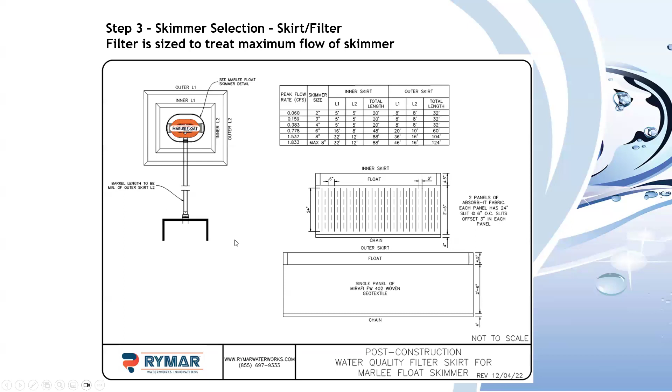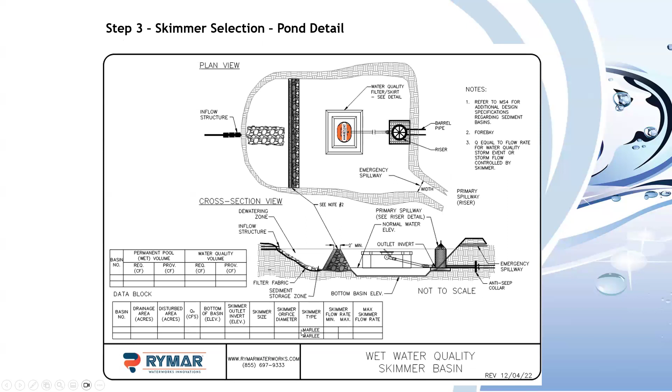And then this is your typical kind of basin, just to show how it would be situated there. You'll have a forebay, and other information on your detail.

So if we look at the hydrology model now with the filter, we'll see our water quality volume is now being released at 0.7 CFS, and we're only using 7,600 cubic feet of that volume. Also, our 2-year storm rate is being released at 0.78 CFS. In our outlet structure, we don't have a low flow orifice—we have the 6-inch skimmer there, and we don't have that 3-inch orifice we used to have.

We'll go up to the 8-inch, which is going to control the 10-year storm above that 2-year storm rate. Our 8-inch orifice is set at about 114.8, and our peak elevation for our 2-year is 14.68. Point being, you're releasing that water quality volume about 3 times as fast as you did under your first flush method, and you're using a lot less volume in the pond to do that.

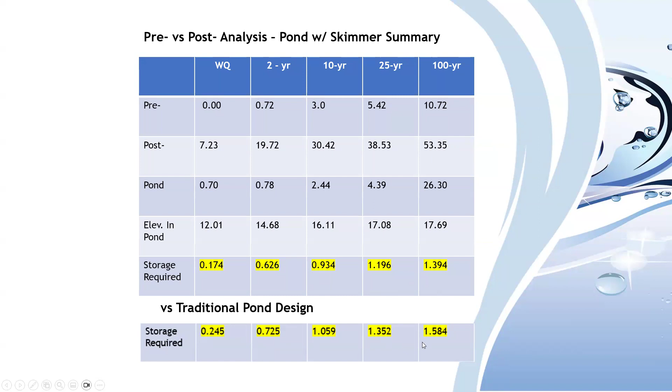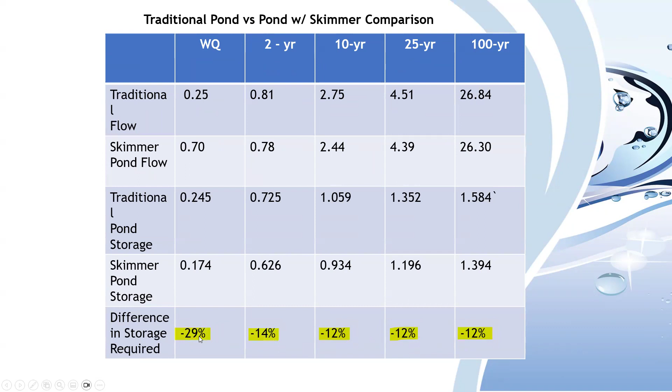And your 2-year storm is a little bit lower than it was before. So if you compare the storage required for each storm event, you'll see that they're less under the filter-based model than under the traditional model, and it's easier to point out in percentages. You're looking at saving about 30% of your storage for your water quality event, 14% on your 2-year, and about 12% on the other storms. So your reduction in total pond volume is about 15 to 20%, while treating to that higher rate.

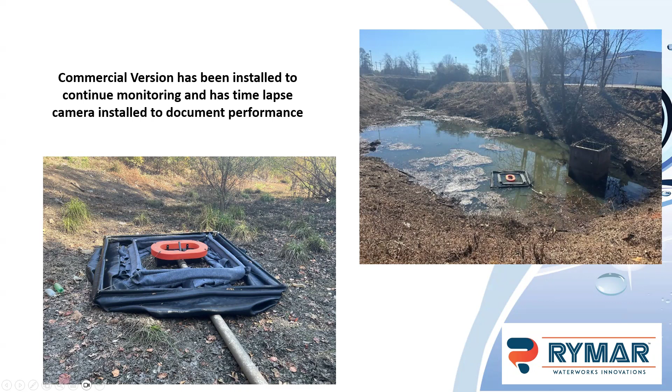Again, this is the commercial version of the filter, so this goes back to that pond. It gives you a better view of what that pond looks like, how steep the side slopes are, how much debris is in it. But it is a dry pond. The skimmer does basically drain it down over time, and it continues to work well. We've got a time-lapse camera set up to make sure it's monitored.

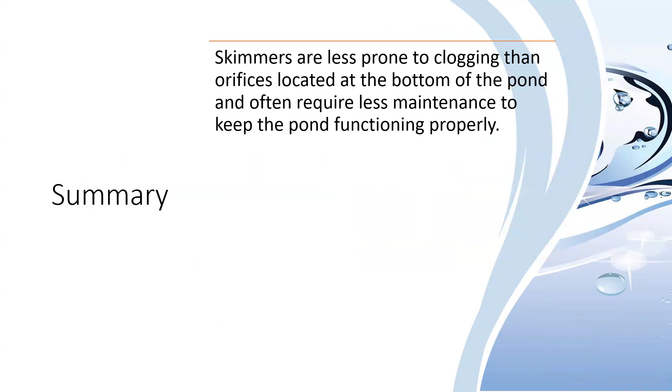So in summary here, skimmers are less prone to clog than other orifices located at the bottom of the pond, and often require less maintenance to keep the pond functioning properly. Asterisk there for frozen conditions. Skimmers can be very effective to retrofit existing basins, reduce that maintenance, provide enhanced water quality, like we showed in the 2 case studies. It's a good way to reduce the clogging that those small orifices tend to experience at the bottom of the pond.

And the surface withdrawal releases cleaner water from the basin for enhanced water quality. This is just with the skimmer itself, no filter involved. If you add the filter, use of the skimmer with the filter has been tested and confirmed for 90% TSS removal efficiency, per that ASTM standard. The skimmer with the filter treats more of the annual rainfall, including those very small storm events and up to the largest event that's managed by the skimmer.

So if you're able to design your site to let the skimmer handle your 2-year storm, you're now treating much more of the annual rainfall, probably over 90%. If you get up to a 2-year storm and below, the vast majority of your rain during the year is going to get treated to that 90% level. And finally, the filtration model reduces the pond size by 15 to 20% over the traditional first flush method.

So for all the consultants on here, I have had one consultant tell me that the client wanted a larger pond because they needed dirt on site, so they were digging out to create dirt. But pretty much everyone else has said, hey, if we can get to a smaller pond, our client would be very happy. So that tends to be the case.